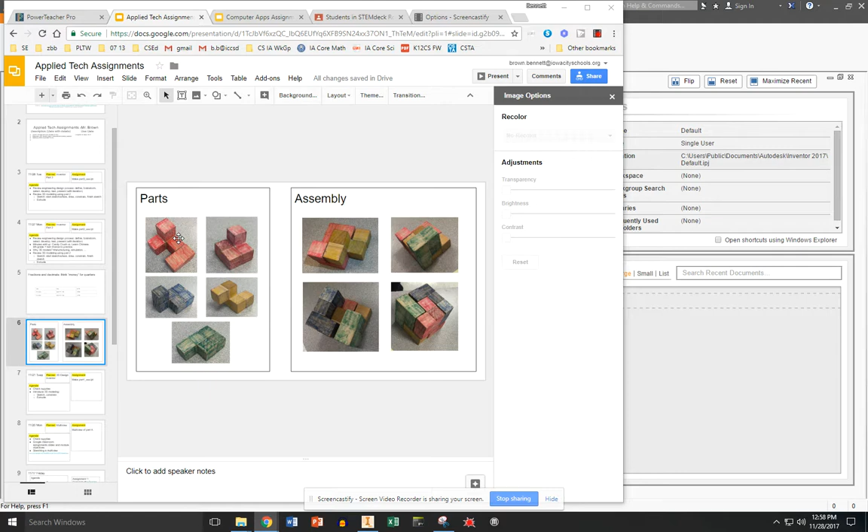Here goes. Autodesk Inventor, which you can find by searching for Inventor or Autodesk Inventor under search windows, and then make sure you choose Autodesk Inventor Professional.

We're going to make a new part. And once we get the new part window open, this screen will be the Home tab and will be inside of another tab at the bottom. So here it comes, I think. Progress is over here and messages down here.

So we're loading some files, and now we can see the 3D model ribbon across the top, the browser right here, and the model space in here.

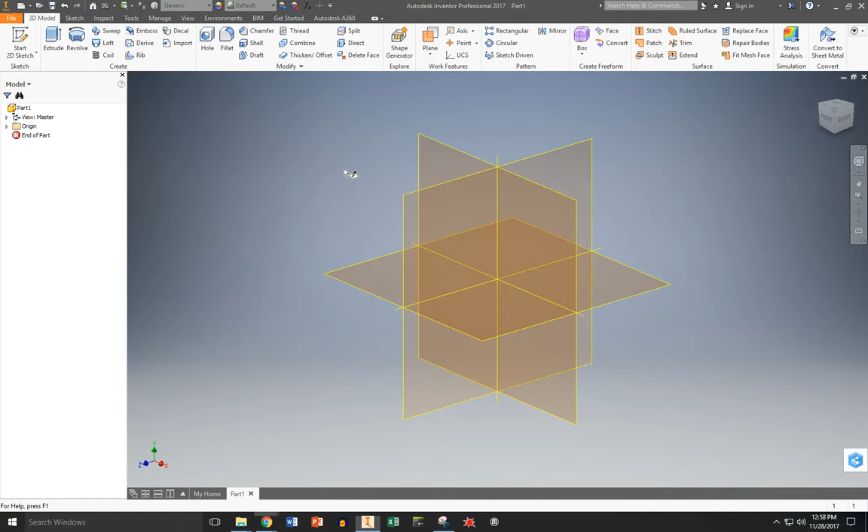As always, we're going to start with a sketch on the XY plane and sketch a rectangle that starts at the origin. Make sure that you have that little red dot and goes to a random spot.

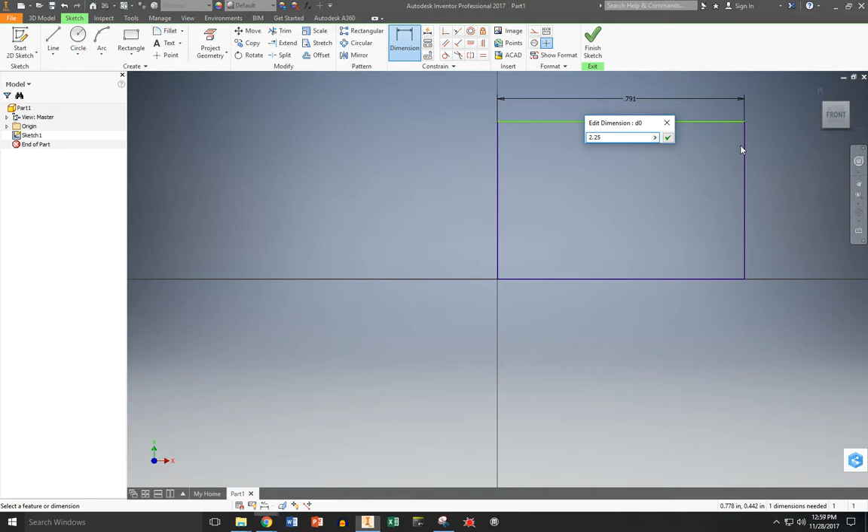Now we need to constrain it. So we're going to make this dimension be 3 of those little wood cubes wide, which is going to be 2.25 inches. And off the screen, so if I click the face of the view cube, it'll resize it. And then I'm going to dimension this side to be 2 blocks wide, so that's 1.5 inches.

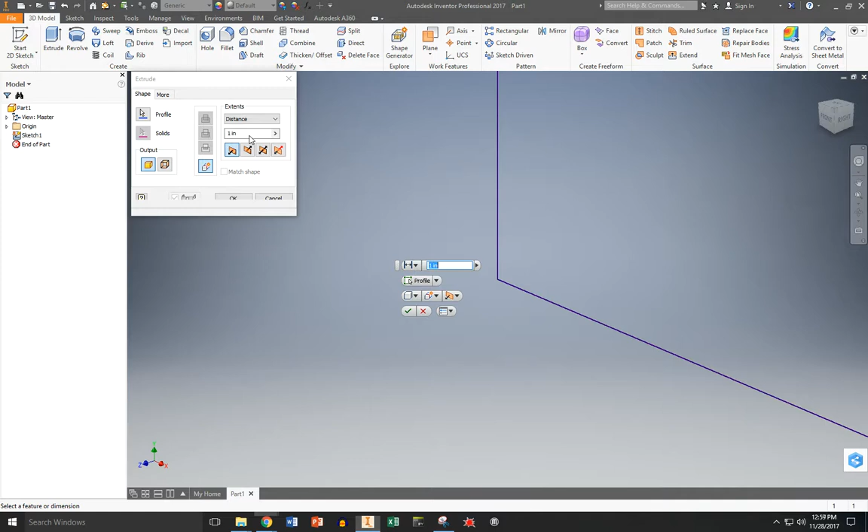And now the whole thing is locked down. I finish my sketch and I extrude that cross section by 1 of the little wooden cubes edge lengths, which is 0.75. And now if I click home, I can see my object.

That is 6 of the little cubes big, and now I'm going to cut out that center cube. So I've made a 2x3 cube little base, and I'm going to cut that out with what's called an extrude cut, and then we're going to build this cube on top of it.

So this whole thing is going to have 3 cycles of sketch, extrude, sketch, extrude, cut, and sketch, extrude. Here goes the second sketch, extrude. Back in Inventor, you notice that the extrusion has no sketch yet, so I'm going to make a new sketch.

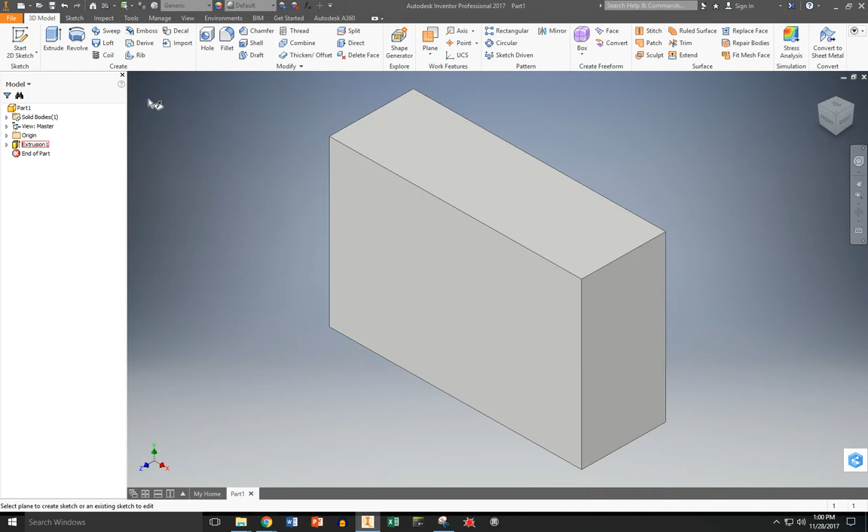I'm going to do it on the face of that object. I'm going to draw a rectangle. It's going to have a non-special spot here and up here. And now I need to dimension 3 things.

One is that this is 0.75 tall, and another is that this is 0.75 wide, and another is that the distance between here and here is 0.75. So I click one and then the other.

It didn't work, so I press escape to get out of the dimension tool. I can keep pressing escape until nothing is highlighted up here, and then dimension, and I'm going to go for the dimension of this to that. There we go. And this I want also to be 0.75 so that that's in the center.

Gosh, if I press escape, I still see that this is green. Why is that green? And I see it didn't make this coincident with that. So I'm going to use a collinear constraint, which is the collinear. That would do the trick.

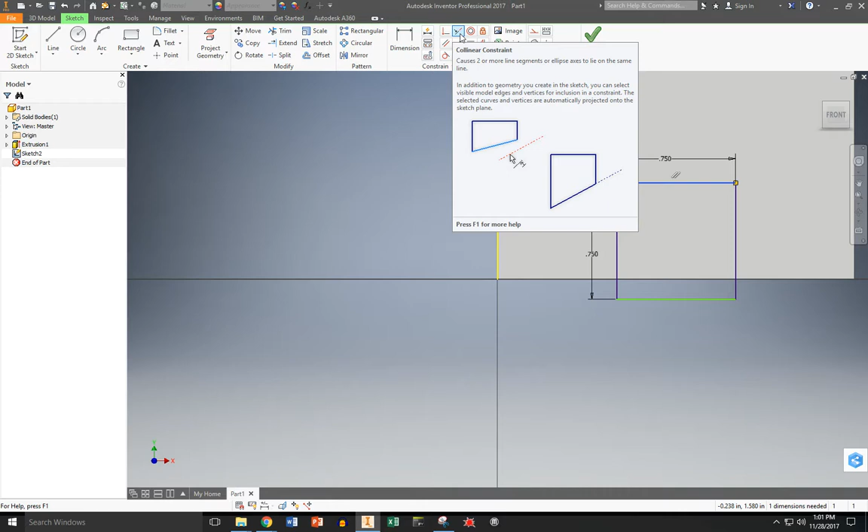This is coincident for 2 points. This is constraining 2 lines to be along the same line. So I'm going to use that tool and constrain this line to be on that line. And now everything is locked down, is constrained.

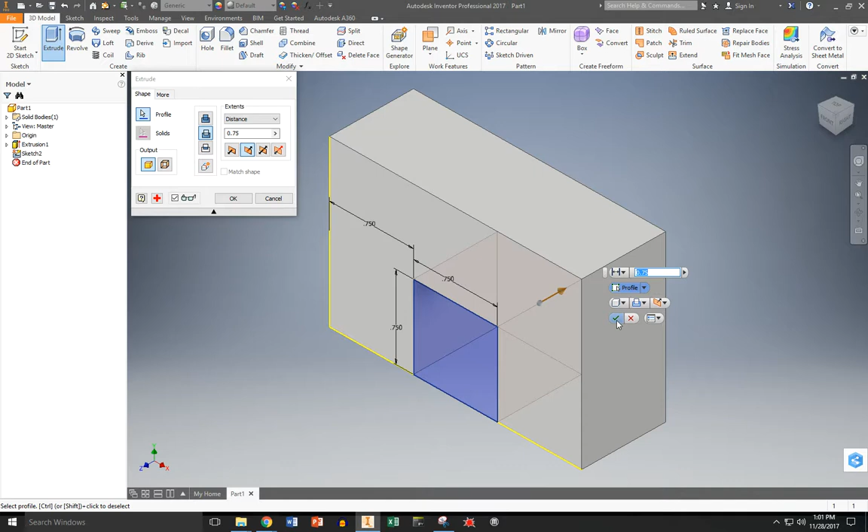I finish the sketch, and I'm going to do an extrude, but I want to do an extrude cut, which is right here, as opposed to an extrude join. So an extrude cut, I select the section. By default, it's going all the way through, which is fine. And now I have the second extrusion done.

Third extrusion, so if I look back at the puzzle piece here, I now have that U part done, and I'm going to go for this cube up on top.

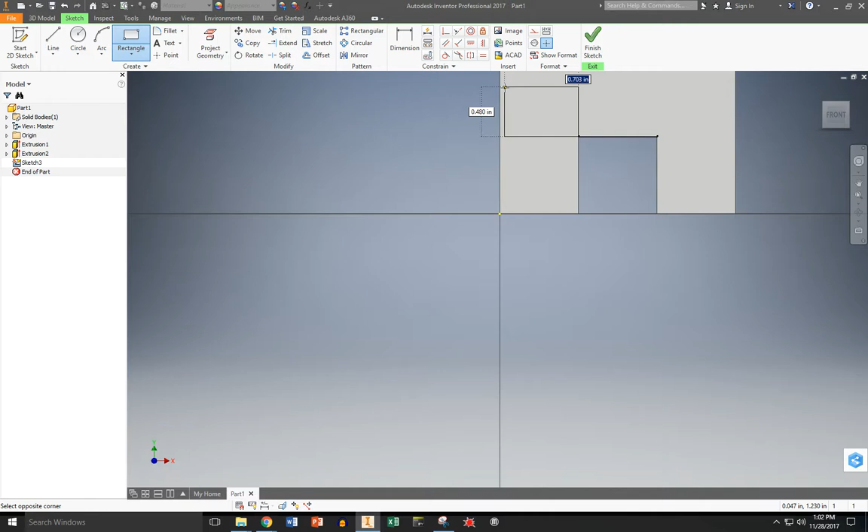So the third extrusion, I sketch again on this surface. I make a rectangle. It's going to go from that point to, oh, I can't see it, so I'm going to use my mouse wheel to scroll out. And that special point. I'm done with my sketch.

It was already constrained because those points were defined. And now I do an extrusion. It's guessing 0.75 and it's correct. And I'm done. I just need to color my part, and I'll choose something pink.

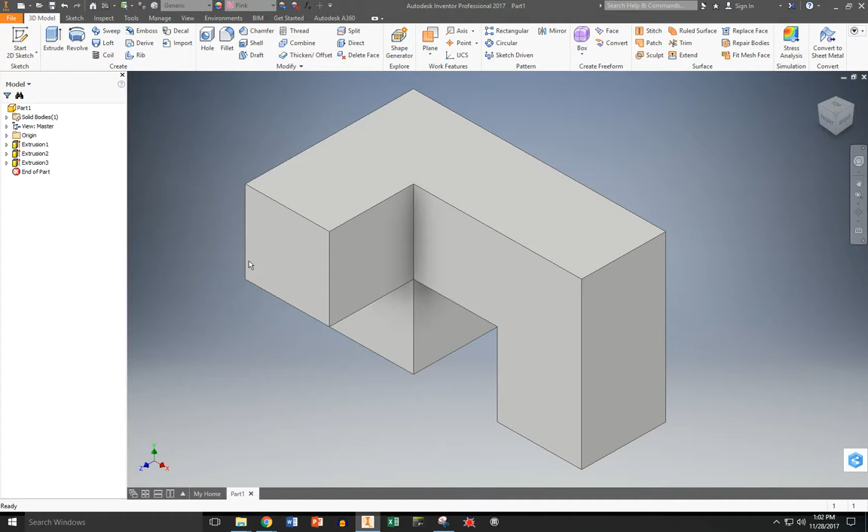Way down here in that menu. File, save as pink puzzle part. Pink puzzle part with my initials.

And now I'm trying to end the video, but don't know how. There it is.